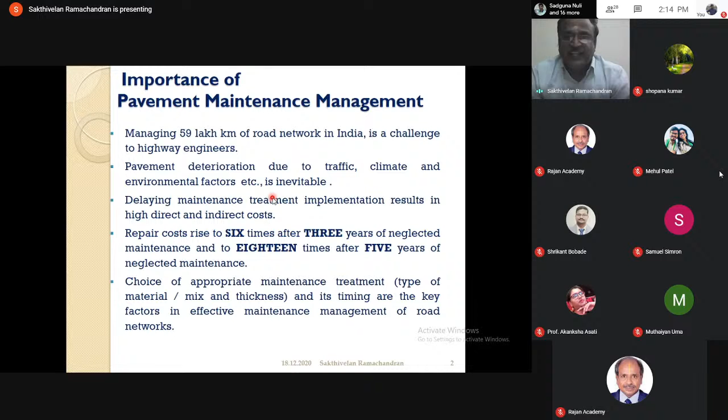As you know, the pavement deteriorates due to various factors like traffic and environmental factors, as I was telling you in my previous sessions, like ingress of water, oxidation, loss of volatiles, inadequacy in the initial structural design, poor construction practice, and inadequate support at the lower pavement layers. Therefore, lower pavement layers are also very important. Inadequacy in the surface and subsurface drainage, lack of good quality control.

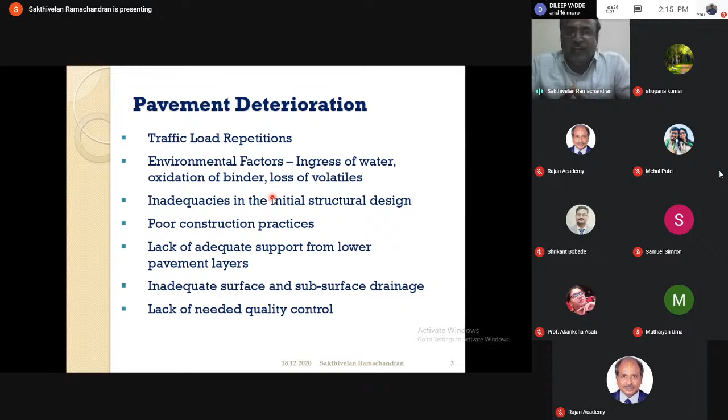As far as maintenance planning is concerned, there are 3 major categories. One is ranking. You rank each project on the set criteria, and finally you select them for the maintenance plan.

Another one is prioritization. You now consider some benefits of the maintenance, and you prioritize. The projects are sorted for each and every year, and there is a chance of backlog due to prioritization.

The third one is called optimization. In optimization, you consider everything over multiple years, over the planning horizon, and you optimize. So this is the most effective method of maintenance planning compared to the other ones.

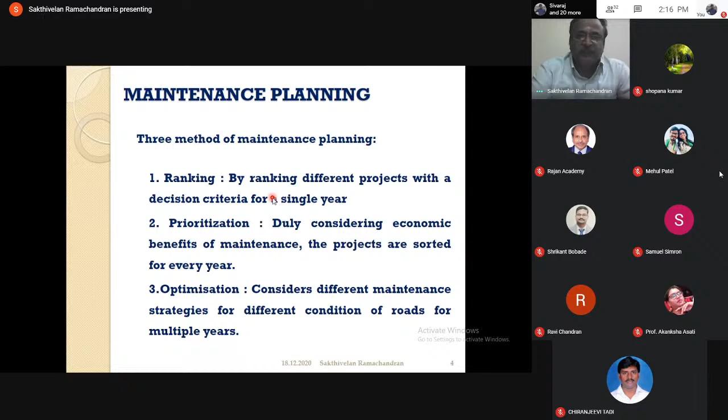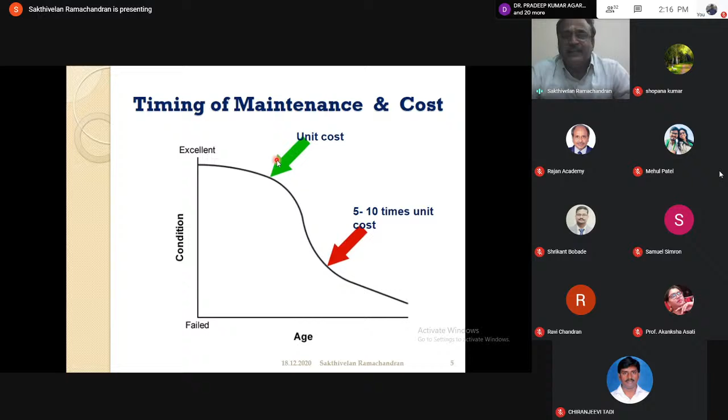The failure rate is more here. In other words, the deterioration rate is higher, whereas here it is very less. Therefore, when you maintain early, it will be a unit cost. But after some time, when you maintain it, it will be 5 to 10 times this cost. Therefore, the earlier the maintenance, the better. That is the general case.

So how is maintenance usually done? These are the different phases of the life. This is the time and this is your performance level. Initially the slope is very meager, later it falls down, and finally it ends in what you call an unserviceable state over a period of time.

So preventive maintenance is provided in a structure or in any system where it is structurally good, but functionally it may not be good. In such cases, you can provide preventive maintenance. When you want your system to regain its original strength, structurally as well as functionally, you can go in for rehabilitation or reconstructive measures.

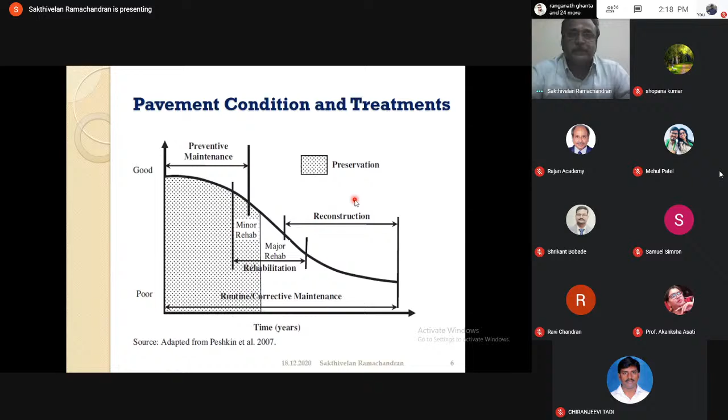So in our scope of investigation, we will be finding out the different distress criteria, how they can be investigated and considered in the optimization process. Second, we have to take into consideration both functional as well as structural condition, which have not been considered earlier in the optimization. Then we should also consider multi-objective optimization. Usually single objective optimizations have been considered, so we can consider multi-objective optimization.

In multi-objective optimization, one of the best methods is the epsilon constraint algorithm, which is effective in generating non-dominated solutions. But it has hardly been used in pavement maintenance optimization for two reasons. Number one, multi-objective optimization itself has not been considered. Even when multi-objective optimization was considered, it was done in different ways to ease out the process.

Identification of the posterior maintenance scheduling strategies from the Pareto frontier. Once you get the Pareto frontier, maybe I use a little jargon, but it's not as much jargon as you think. These are nothing but non-dominated solutions, by some distance metrics you can identify the scheduling strategies. Other optimization approaches can be thought of and used suitably for the different scenarios.

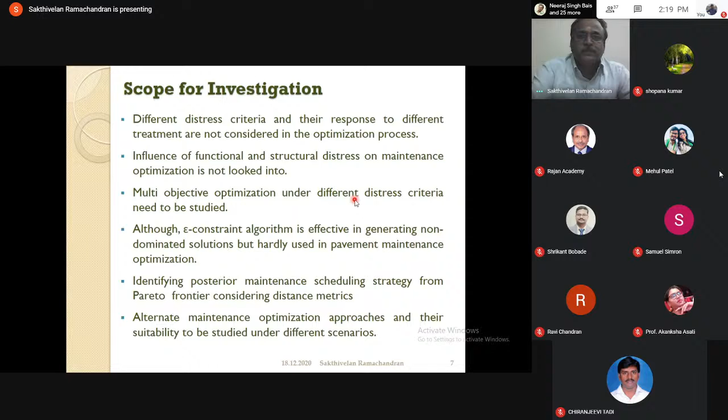The present study's objective is to find out the structural and functional distress criteria to be incorporated. Next, we have to find the timing for the preventive maintenance intervention. Third is to formulate a multi-objective optimization model. Then you have to think about other alternative strategies. Finally, you have to provide a framework to decide the suitability of the alternate optimization techniques for the maintenance management of highway networks.

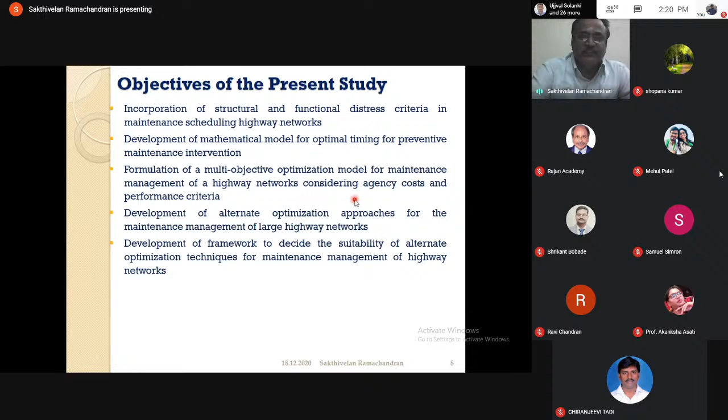As far as the scope is considered, we will be using the structural condition of the pavement by considering the rebound deflection, using a Benkelman beam test, and the functional condition from the roughness obtained from a fifth-wheel bump integrator. We should have the pattern of distress progression, how the distress progresses over time, and how a particular treatment is responded to by the pavement. Both have been taken from the literature, and of course this will be validated later.

The discrete time period is taken as 1 year. For every year, we will be taking the response of the pavement, and the treatment will be done at the beginning of the year. In other words, we let the deterioration go from beginning to end, then at the beginning of the year we apply some treatment, then again deterioration goes. That is the order we have taken.

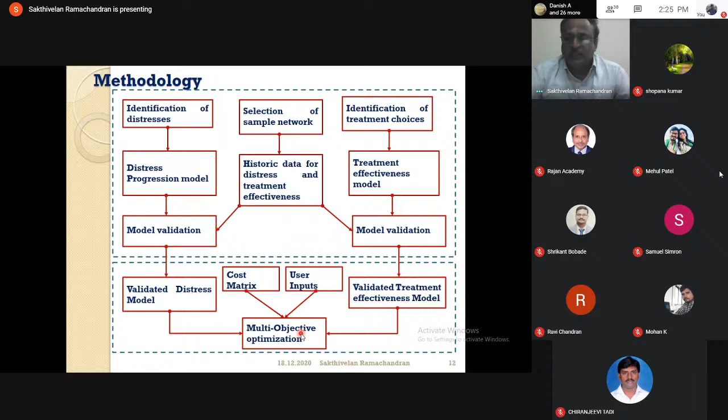So this is the methodology continued, and we have the optimization here. This optimization process can be done with any of the approaches. Number one is mathematical modeling. Mathematical modeling is purely an analytical model, and this model may be linear programming, non-linear programming, dynamic programming, mixed integer linear programming or integer linear programming. You will have different types of programming there, and the models have to be made.

And moreover, this has to be done not only for a single objective, but for multi-objective optimization. Therefore, each mathematical model has to be made for a single objective as well as for a multi-objective scenario. In the multi-objective scenario, we are using an epsilon constraint algorithm. The epsilon constraint algorithm will produce a set of non-dominated solutions or Pareto solutions. When you want to increase one objective's performance, there will be a loss in the other objectives' performance.

We will get the extreme edges of the mathematical modeling optimization for the multi-objective scenario, and this can also be done with meta-heuristic concepts. What does meta-heuristic mean? In mathematical modeling, there is a difficulty for larger networks because of the computational effort. Even for 10 roads and 10-year planning, it will take more than 2 weeks to run the program. Therefore, we have to model in a different way where we will lose a little optimality, but we will definitely end up with some good solutions.

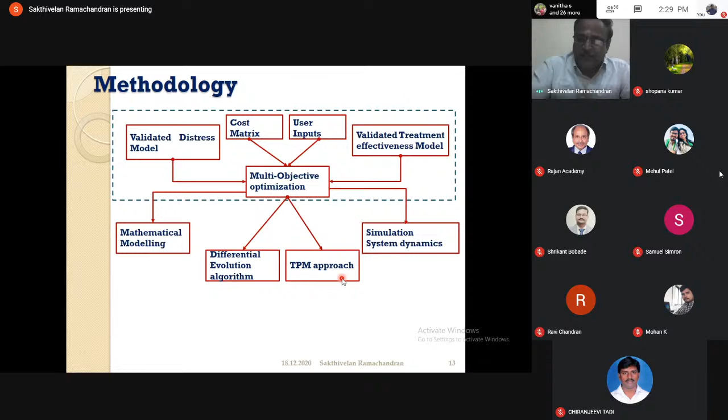Okay, fine. So in mathematical modeling, what we do is consider the time; we set time to 0. As I was telling you, we have two distress criteria considered. One is roughness and another one is deflection. As you know, roughness is how the pavement is seen. It may be a rough or a smooth one. A smooth pavement is considered good, and over the period of time the smoothness gets worn out and we get a rough pavement. Therefore, lower level roughness is a good one, higher level roughness is towards failure.

Similarly, deflection. Deflection is nothing but how it deflects for a particular load. For example, what we consider is a Benkelman deflection. To put it more simply, if the pavement is good, it will have a lower deflection. If the pavement is bad, it will have a higher deflection. But over a period of time, roughness as well as deflection increases, which means it is functionally and also structurally deteriorating. So roughness indicates the functional criteria and deflection indicates the structural criteria. That's what I put as two criteria here.

And over the period of time, roughness and deflection increase as a function of R0, D0, meaning initial roughness and initial deflection, and time. These deflections are what you find at the end of every year. Then you set this as the beginning deflection, that is, deflection before treatment and roughness before treatment. You apply some treatment, and you get deflection after treatment and roughness after treatment. Then you recycle it for the next year. So for every year you recycle the same process and you interact with the optimizer.

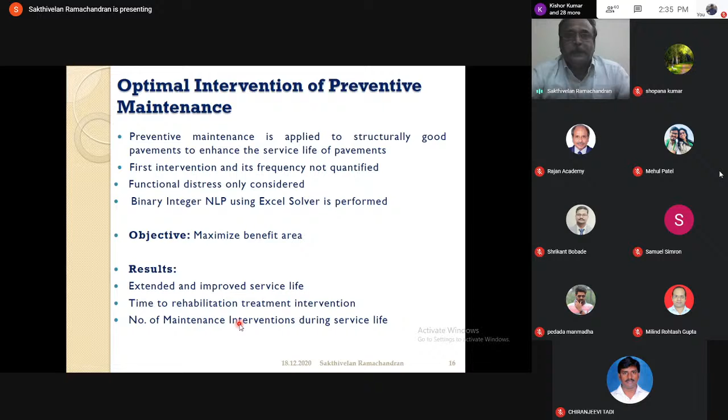The objective is maximizing the benefit area; I will tell you what the benefit area is. We can find the extended and improved service life, time to rehabilitation treatment intervention, and number of maintenance interventions. These are the results we can find out. So this is how it goes.

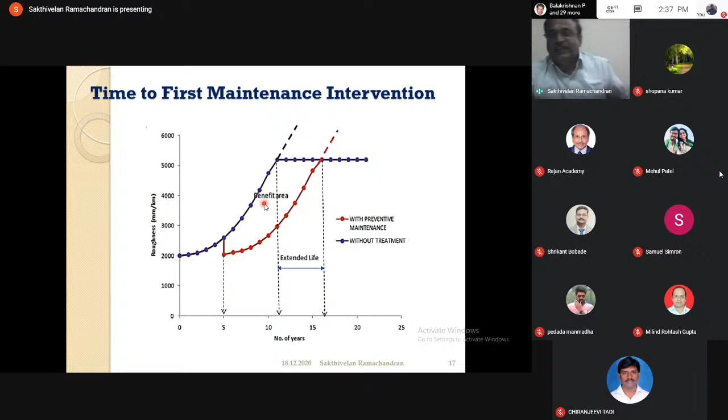The second case we'll see: there is an identical traffic level, but the initial pavement condition is different.

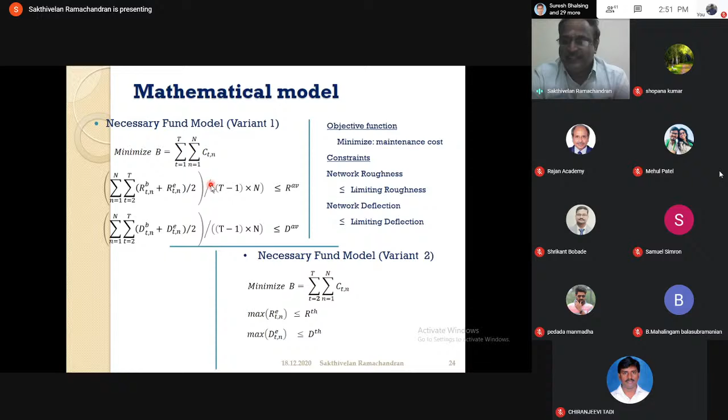Therefore, other treatments will have a higher value, and only this treatment will be selected. That way we make the optimization process change according to the way you think. In the previous case, you make the optimization process work the way you want, but you cannot change its path; you go along with it and try to get the advantage of that. But here you can change the path itself. That is what this model gives.

And what is the main application for the necessary fund model? One of the best applications is to find the effect of deferred maintenance. When you want to maintain at a particular time, you have to maintain at that time. If you delay it, what will happen? That is what I did. We considered 2 types of pavements: structurally inadequate and structurally adequate. In both cases, we made a necessary fund model and ran the optimization process.

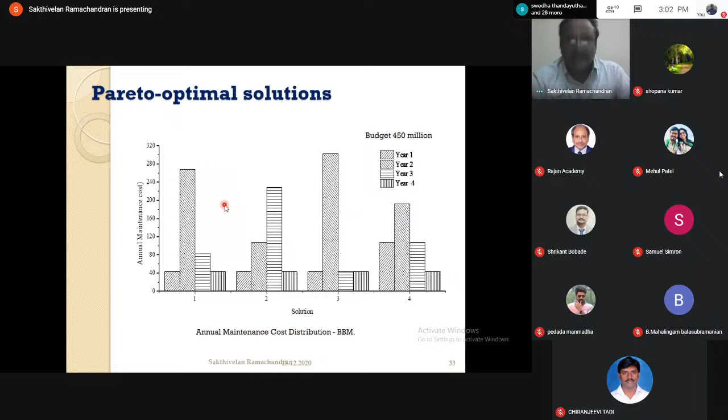What you do is put them on a horizontal axis. This is your reference point, called the ideal point. This is an ideal solution, and you put the maximum and maximum. This is the maximum solution. You can treat this as a nadir point or a maximum point, and this is called the reference point or ideal point. For that you have to make a normalized roughness and normalized deflection.

That is, you divide roughness by maximum roughness, deflection by the maximum deflection. This value is the maximum value. Therefore, when you divide by those, this value will be 1. Other things will be within that. Therefore, this is your reference rectangle. Feasible solutions. This line is called

Pareto points or Pareto solutions. The Pareto solutions are non-dominated solutions. Non-dominated means each one is good. That is called a non-dominated solution. There will be some more solutions, and those are called dominated solutions. They will not come, because the optimizer will give only these non-dominated solutions; your epsilon constraint will bring you only these 4 solutions.

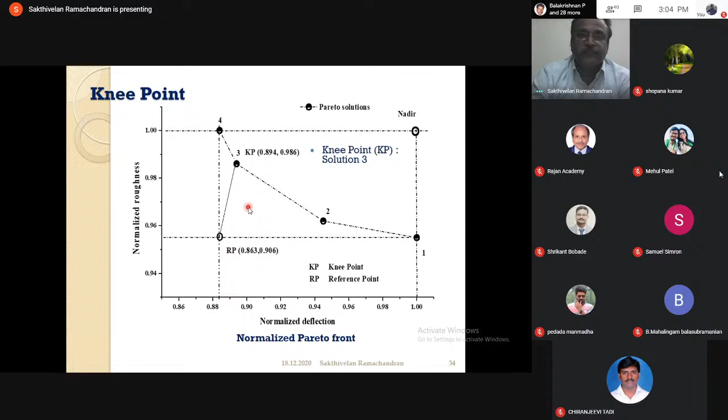Okay, therefore you should have a large computer. For example, for large networks like the Government of Tamil Nadu, they can buy large computers because it is a total department. For an individual contractor or individual user, it is very difficult. That is a problem here. Therefore, in such cases, you have to go for another alternative that is called meta heuristics.

So before I go into this, I would like to ask Dr. Rajan to respond. Dr. Rajan? Dr. Rajan? Anyone from control room? Sir, I will call Dr. Rajan sir and he will respond to you. Is it fine, sir? Okay. Because it is another method of solving, with this we will wind up. We can keep another seminar on other things. I think Rajan sir is connecting within a few minutes. Dr. Rajan, hello. Yeah, tell me, sir.